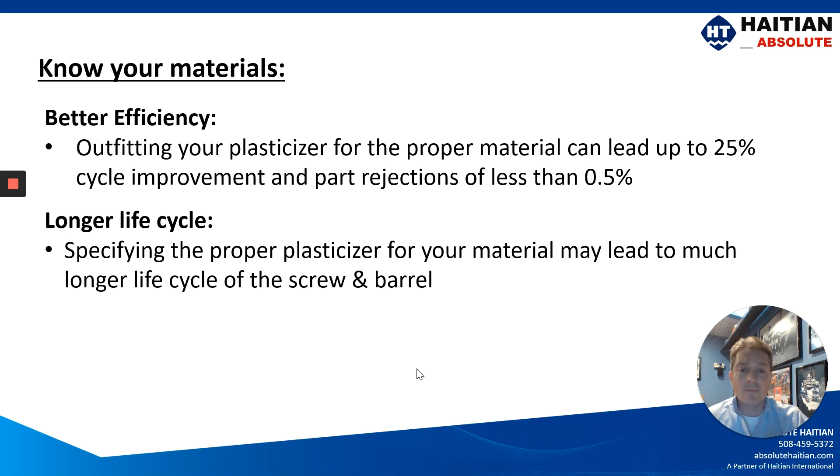When you're speccing out your molding machines, you first want to know your materials. Outfitting your plasticizer for the proper material can lead to up to a 25% cycle improvement and part rejections of less than 0.5%. Specifying the proper plasticizer for your material may also lead to a much longer life cycle of your screw and barrel. So take the time, it's worth it to generate a proper specification for your machine.

Let's look at some of the major factors. The degree of crystallinity is the resistance to deformation as heat is applied over time, and there are two different types of crystallinity: amorphous and semi-crystalline.

Let's look at some amorphous materials. Amorphous softens gradually with no defined melting point. These are materials like polystyrene, ABS, polycarbonate, PVC. They are slow to absorb heat and they're shear sensitive. They require longer transition zones on your screw with deeper channels for lower compression ratios.

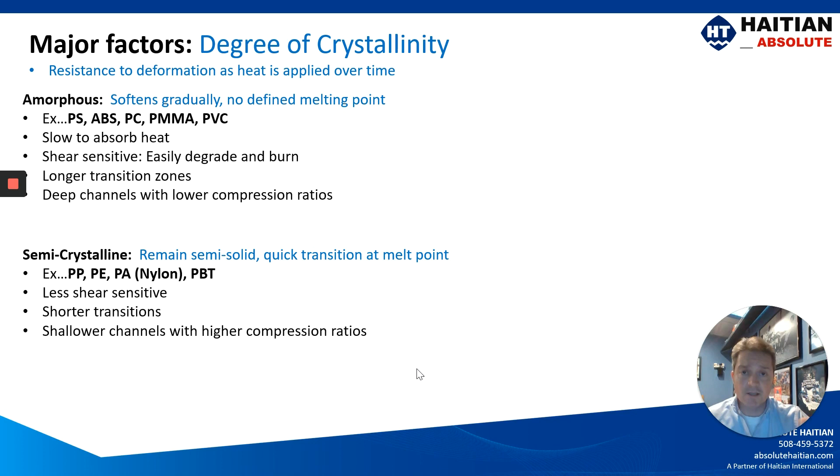Whereas semi-crystalline materials remain a semi-solid with a quick transition melting point. These are materials like polypropylene, polyethylene, nylon, PBT. They are less shear sensitive materials that require shorter transition zones on your screw with shallower channels for more shear in your material. A compression ratio is the ratio of your feed flight depth to your metering depth.

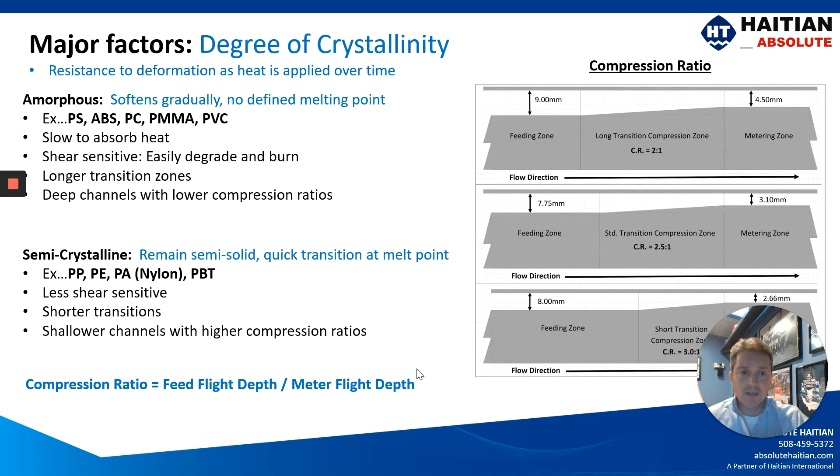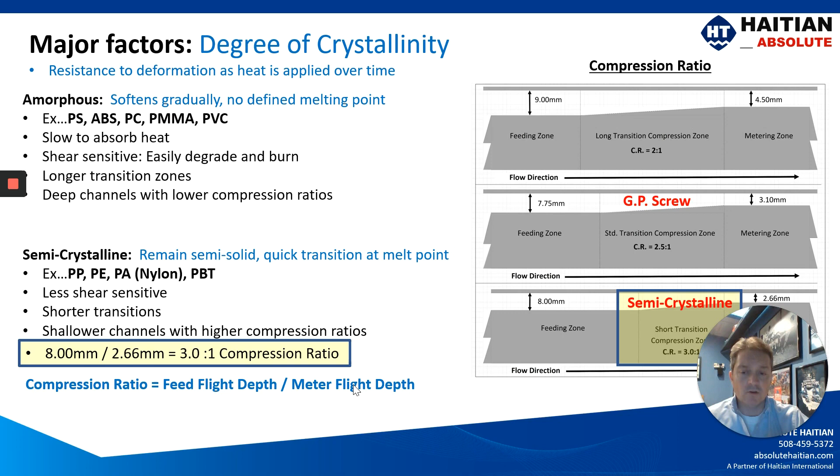As we look at a couple of different compression ratios, let's focus on a GP screw. A GP screw traditionally has a 2.5 to 1 compression ratio, generated by dividing the feeding zone by the metering zone. That's where you come up with your 2.5 to 1. Compared to an amorphous material, which would have a compression ratio more along the lines of 2 to 1, whereas a semi-crystalline material would have a compression ratio of 3 to 1.

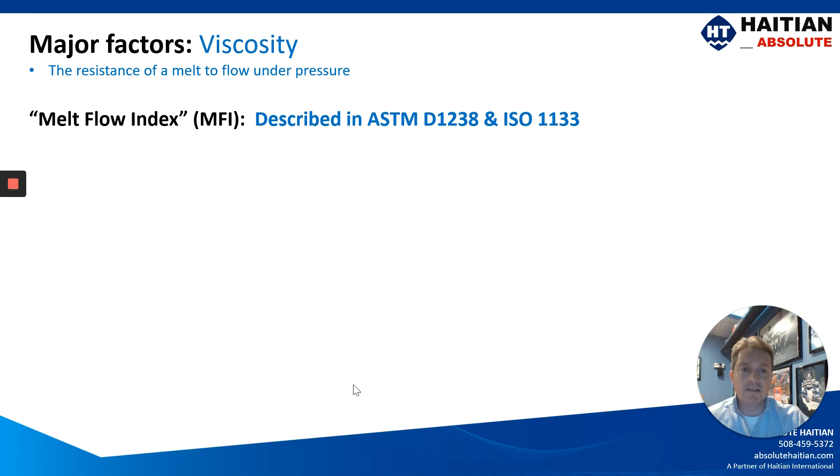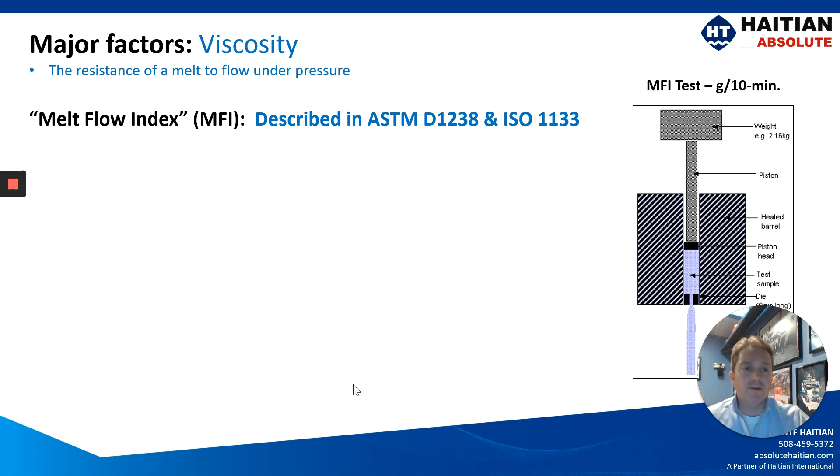Let's look at viscosity of your material. Viscosity is the resistance of the melt to flow under pressure, generally measured by what's known as a melt flow index described in ASTM standards, where you have a given weight pressing on a cylinder that is heated to a given temperature, with an output of weight over a 10-minute period - in this case, grams per 10 minutes.

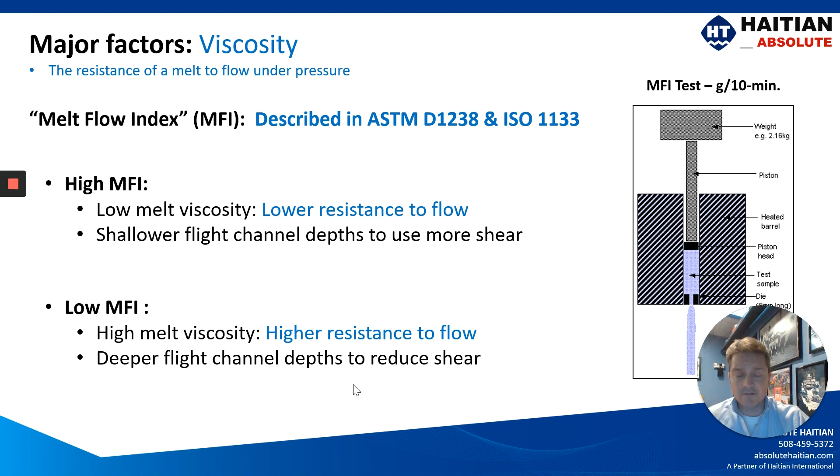A high MFI material is a low melt viscosity with lower resistance to flow, requiring shallower flight channel depths to use more shear on the material, versus a low MFI, which is a higher melt viscosity with higher resistance to flow, which would generally require deeper flights with less shear.

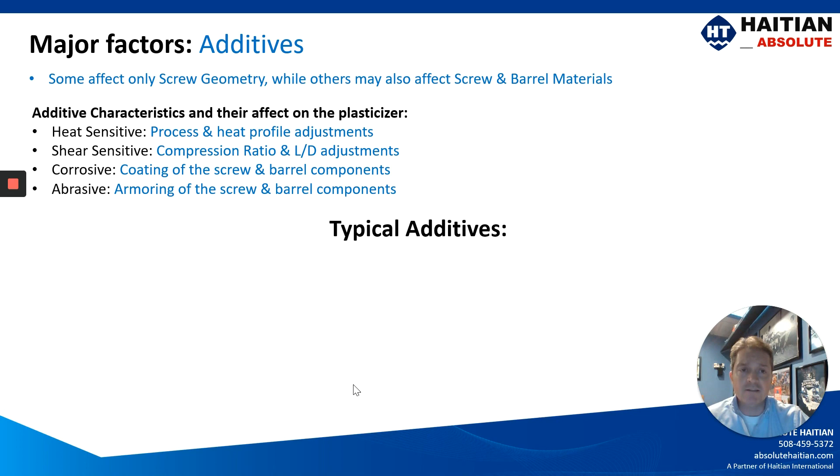And how about additives to your materials? Some affect only the screw geometry, while others will also affect the screw material and barrel materials. Additives are generally heat sensitive, shear sensitive, corrosive, or abrasive. Typical additives that you will see are color concentrates both in pellet and liquid form, organic fillers like glass and mica, UV stabilizers, blowing agents, and slip agents.

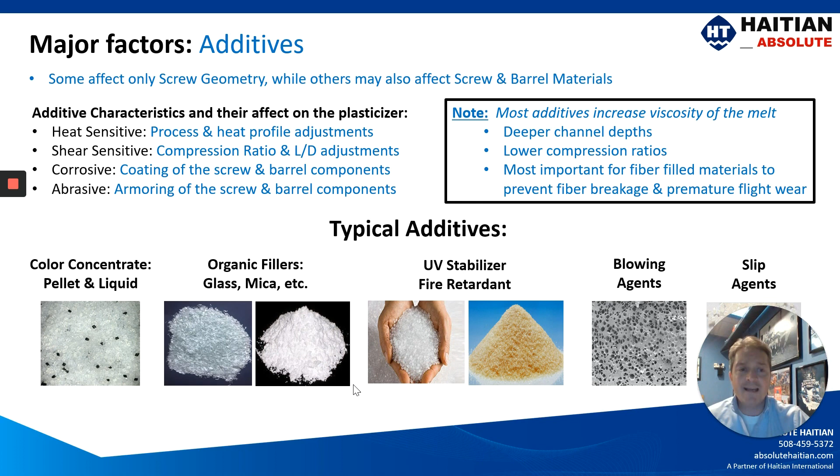In almost all cases, these additives are going to increase the viscosity of your melt, generally requiring deeper channel depths on your screw with lower compression ratios. This is most important for glass-filled fibers, to prevent premature breakage and premature flight wear, by having the deeper channels.

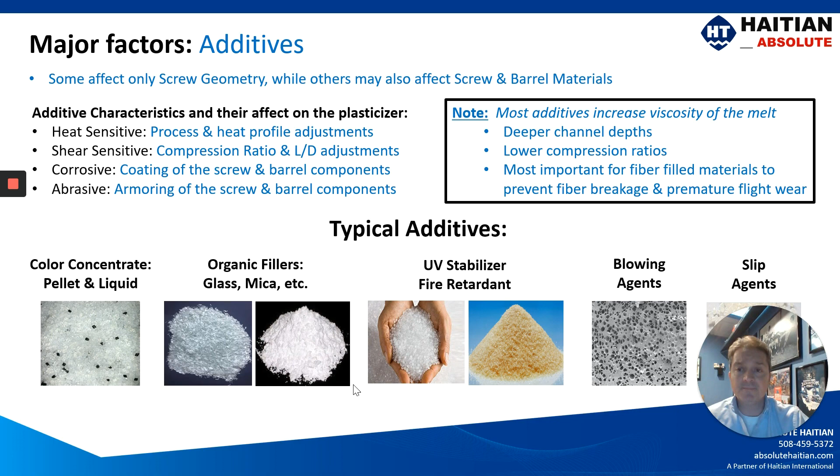Let's look at the material density and the output factors of your material. Almost all material suppliers will be able to supply you with: one, the solid density of your material; two, the melt density; and three, the bulk density. All three of these densities are important for calculating your residence time on your barrel. But there's one more density that must be considered.

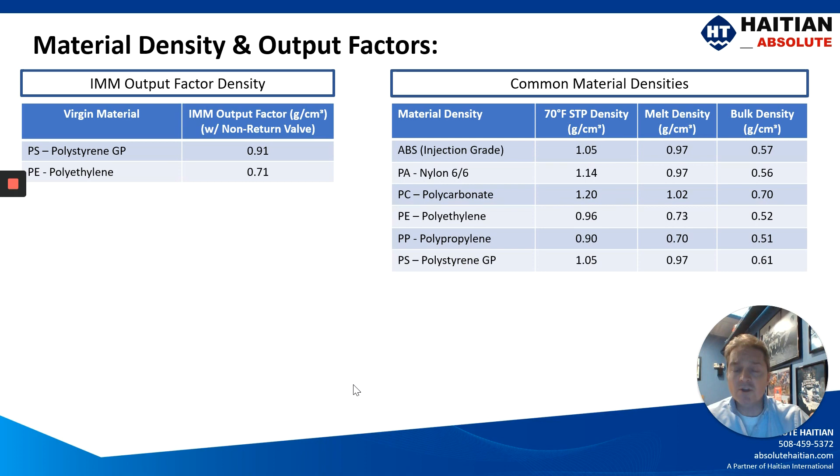Almost all OEM machine suppliers, when they quote you machine specs, are going to be talking about an output factor. What an output factor does is take into consideration the non-return valve and its behavior on the amount of material that the machine has an output for volumetrically.

So if we look at polystyrene, which is what most machine manufacturers are talking about, you'll see it has a melt density of 0.97, whereas the output density is 0.91. This has to do with the amount of material needed to set the check ring. The same thing is true for polyethylene, which has a melt density of 0.73 with an output of 0.71. Again, that has to do with the non-return valve.

But how about when you have fillers in your material? You can see down below for polypropylene, when you add 20% talc, it takes your density up to 0.85 versus glass fill, where with a 40% glass fill, you've got a 0.98 gram per cubic centimeter density. So fillers always increase the average density and increase the shot capacity of your molding machine. Take that into consideration when speccing out your machine.

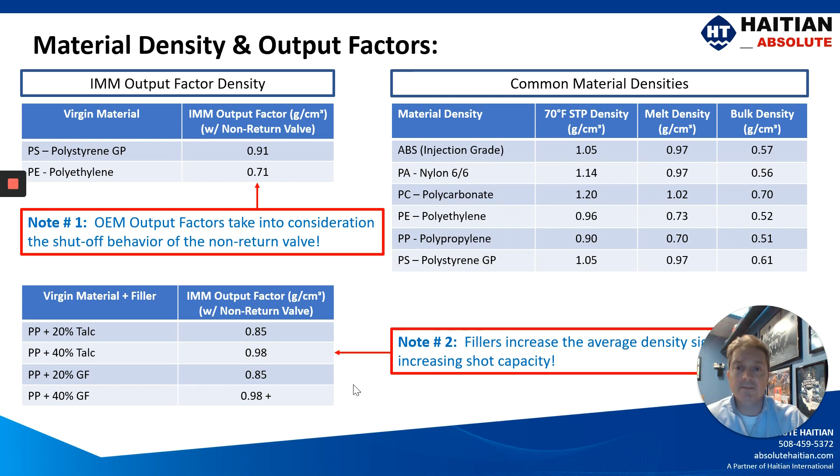Let's talk about residence time. This is the amount of time the resin is in the barrel before it's injected. The most common mistake that molders will make is just dividing the shot weight by the machine capacity.

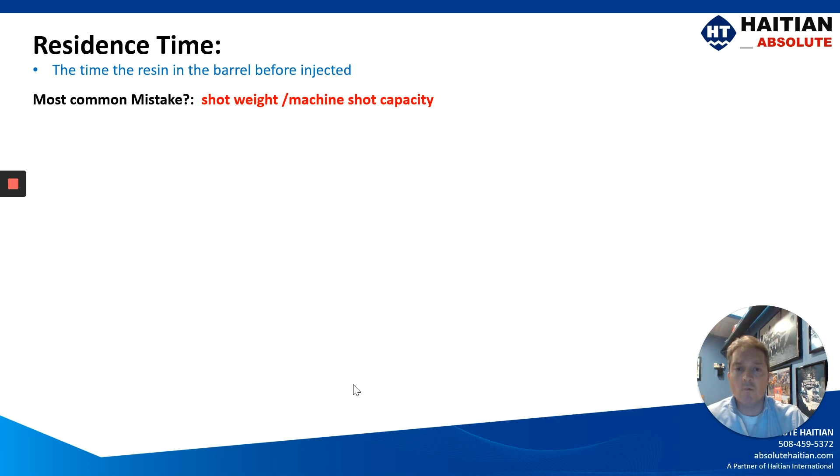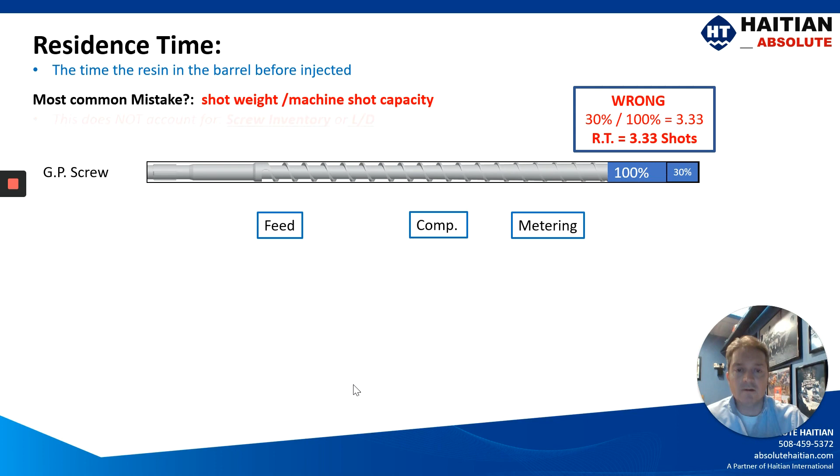Let's look at a general purpose screw with a general feed, compression, and metering zone, assuming you've got 100% shot size, and we use 30% of it. 30% would tell you that you've got 3.3 shots capacity of residence time. But what about all of that material in the barrel? That calculation is wrong. We need to be considering what's on the screw inventory as well as the L over D.

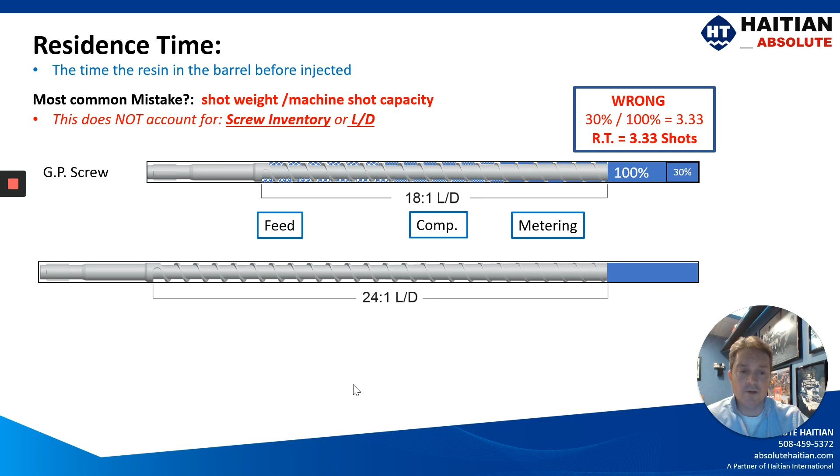There is a lot more material on that screw, both bulk density, bulk and melt density, and then the melt density going through the metering zone. And that also doesn't take into consideration what L over D screw we're talking about. As you can see here, we have an 18:1 L over D, and below we have a 24:1 L over D, both with the same shot sizes. So if you were running a 24:1 L over D, you'd have a lot more material compared to your shot size.

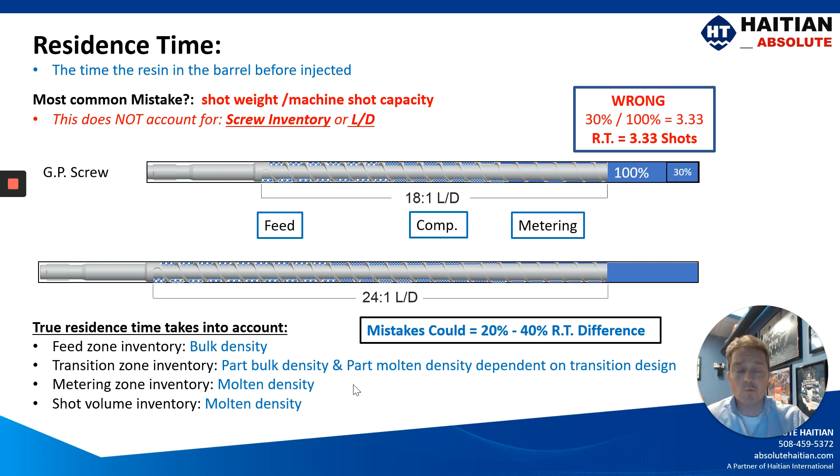So true residence time incorporates the feed zone inventory in bulk density, the transition zone inventory in both bulk density and melt density, the metering zone in melt density, and the shot volume in melt density. Having a mistake in this area could equate to a 20 to 40% difference in your residence time calculation, which could be a big problem on some of the materials you might be running.

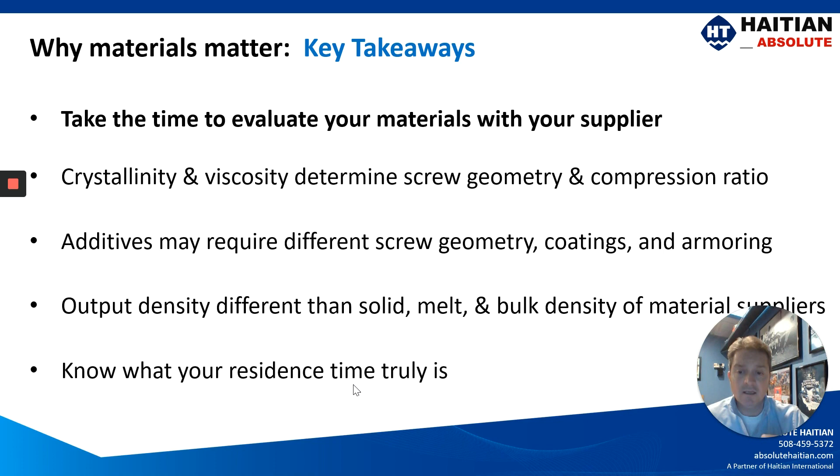So let's look at some of the key takeaways from this video. Take the time to evaluate your materials with your machine supplier. The crystallinity and the viscosity determine the screw geometry and the compression ratio of your screw. Additives may require different screw geometry, coatings, and armoring of your screw and barrel. The output density is different from the solid density, the melt density, and the bulk density. And know what your residence time truly is.

In our upcoming videos, we're going to touch a little bit more on screw geometry, fast cycle machines, auxiliary machine functions, and automation.